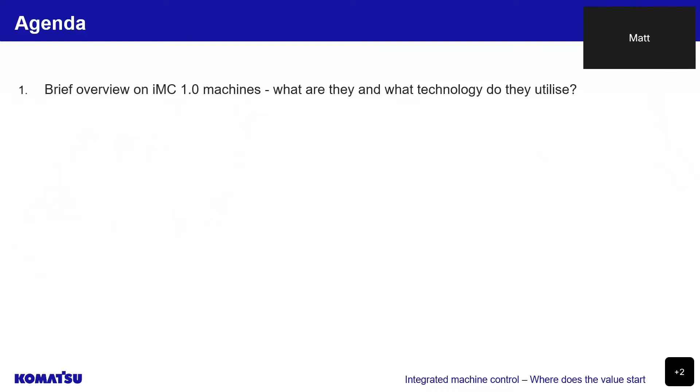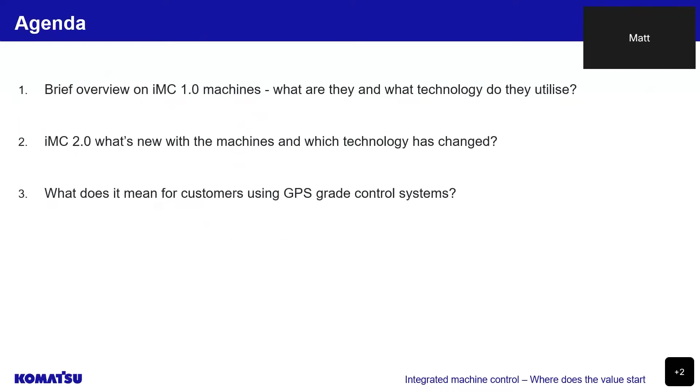In this webinar, we'll be taking a brief look back at our 1.0 machines and the technology they utilise. We will then dive into what's new with our 2.0 machines and their technology, and also talk about what it all means for customers using GPS-grade control systems, followed by some Q&A.

Firstly, I think to gain an understanding of our current technology, it's important to have some background knowledge on where we've come from. So let's look at our iMC 1.0 machines, the first iteration for intelligent machine control, and the technology they've utilised over the past 7 years.

Komatsu's original range of iMC bulldozers and excavators were an industry-leading first for not only safety and security, but efficiency and cost saving as well.

Starting with our bulldozer range, which you'll find on most civil construction sites, and beginning with the smallest bulldozer in our iMC range, the D61 EXI and PXI-23, an excellent trimming bulldozer. This bulldozer has an operating weight between 17.8 tonne to 20.5 tonne, a pat blade or power angle tilt blade, and an engine output of 168 horsepower.

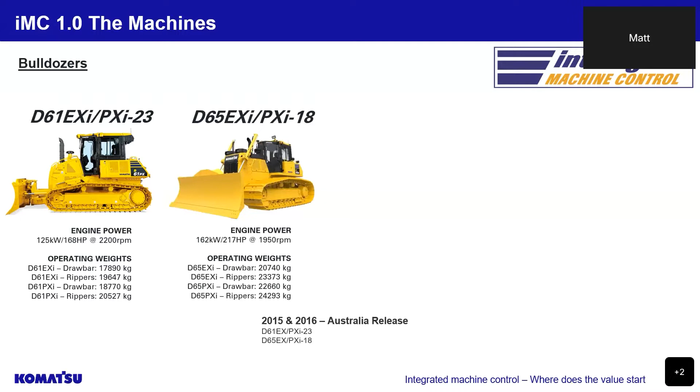Next in our lineup is the D65 EXI and PXI-18, with an operating weight between 20.7 tonne to 24.2 tonne, a pat blade, or the option for a blade and push arm style work equipment setup, as per the D85 and 155, and an engine output of 217 horsepower.

Then we have the D85 EXI and PXI-18, with an operating weight between 30.5 tonne to 32 tonne, a blade and push arm style work equipment setup, and an engine output of 264 horsepower.

And finally, we have the D155AXi-8, which is used for bulk earth moving works with an ability to trim to a design and an operating weight of 32.7 tonne to 42.4 tonne, a blade and push arm style work equipment setup, and an engine output of 354 horsepower. These models were all released into the Australian market between 2015 and 2016.

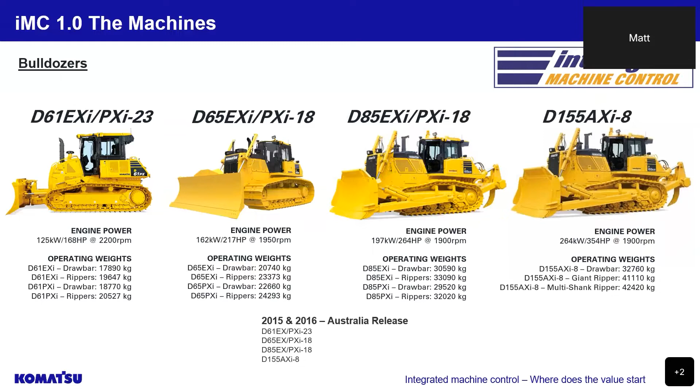The technology utilised in the 1.0 bulldozers was a single cab-top mounted GNSS or Global Navigation Satellite System antenna, responsible for receiving satellite signals in order to position the machine on the job site in relative coordinates. A chassis-mounted IMU, or inertial measuring unit sensor, which along with intelligent logic, orientates the body of the machine underneath the antenna, either sloped or flat.

Hydraulic cylinders with factory integrated stroke sensors monitoring the lift, tilt, and angle of the blade, allowing the machine control system to know the exact position of the blade at any given time. A factory installed touchscreen control box, allowing easy operator access to set or adjust design surfaces and to display GNSS satellite information.

4 working modes, which determine how the blade reacts to loads, which are cutting and carrying for long, shallow cuts or normal dozing operations, cutting for short-range cutting operation, spreading for the spreading operation of soil piled higher than the height of the blade, and simple grading used to carry out final trim or slope and batter work.

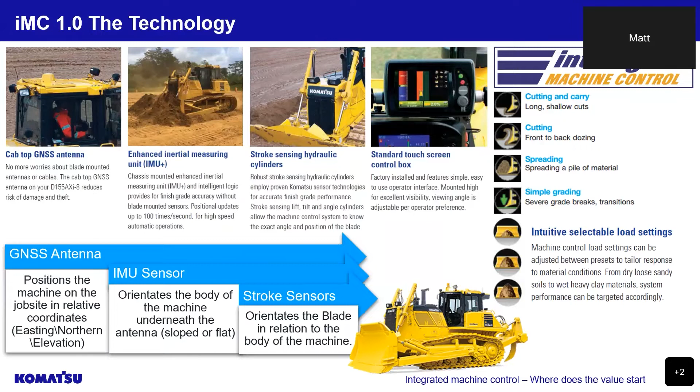And lastly, 3 intuitive blade load settings, selectable depending on the desired response to the given material conditions. For example, dry sandy material might call for a light load setting, whereas a heavy clay type material would call for a heavy load setting.

Looking at our excavator range, which started off with the PC210 LCI-10, released to the Australian market in 2016, with an operating weight of 22.6 tonne to 23.8 tonne, and an engine output of 158 horsepower.

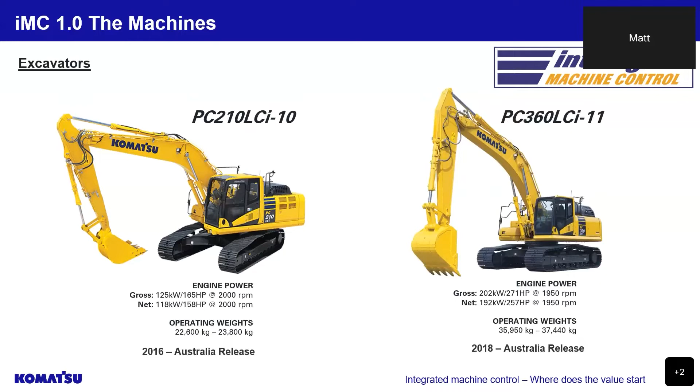Followed by the PC360 LCI-11 in 2018, with an operating weight of 35.9 tonne to 37.4 tonne, and an engine output of 257 horsepower.

Both of Komatsu's 1.0 excavators utilise the same technology, which includes stroke sensing hydraulic cylinders with factory integrated sensors to monitor boom, arm, and bucket positioning, allowing the control system to know the exact position of the bucket cutting edge at all times. An IMU, or inertial measuring unit, that monitors the pitch and roll of the machine in order to produce highly accurate finishing work.

2 GNSS antennas responsible for receiving satellite signals and sending them to a GNSS controller in order to accurately position the machine on the job site. A large 12-inch monitor allowing excellent visibility and ease of use with a touchscreen icon interface instead of a multi-step menu to simplify operations.

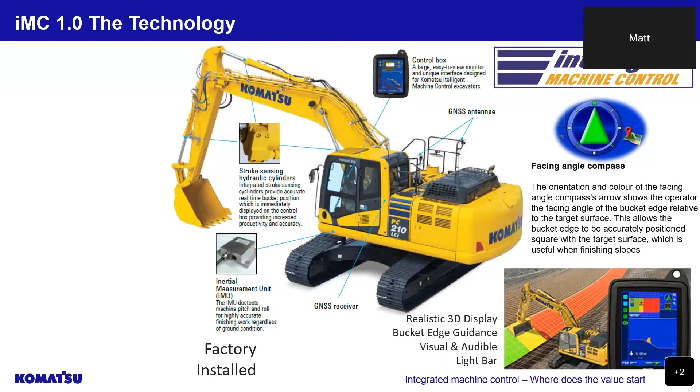A unique facing angle compass indicates the angle of the bucket in relation to the target surface. This assists the operator to accurately position the bucket edge square to the target surface.

An auto grade assist function for the arm movement, auto stop control function for the boom and bucket movement, and minimum distance control for the bucket edge, all of which we will go through in more detail when we look at the 2.0 excavators shortly.

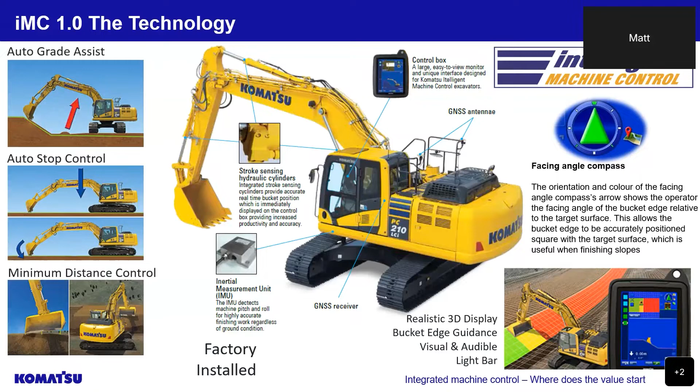So secondly, let's talk about the iMC 2.0 machines. When iMC 1.0 came on the scene, the benefits were all around increasing ease of operation and productivity. Komatsu's 2.0 machines are all about building on those features.

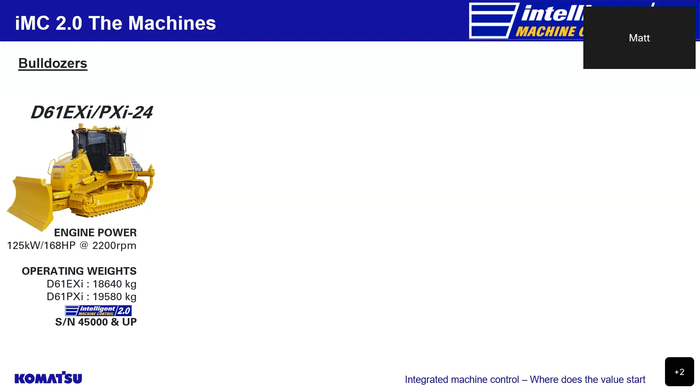Let's take a look at what is new with these machines and their technology, starting once again with our range of iMC bulldozers. If we look once again at Komatsu's D61 EXI and PXI bulldozer, it is now reclassed as a -24 with an operating weight of 18.6 tonne to 19.5 tonne. The engine output remains the same at 168 horsepower, and the improved 2.0 range starts at machines with a serial number of 45,000 and up.

Next, the D65 EXI and PXI-18. It now has an operating weight of 23.3 tonne to 24.2 tonne. The engine output remains at 217 horsepower, and the 2.0 range starts at machines with a serial number of 96,001 and up.

Last year, Komatsu introduced the all-new D71 EXI and PXI-24 into the Australian market, our largest HST, or hydrostatic transmission type bulldozer. This bulldozer has an operating weight of 22.7 to 24 tonne and an engine output of 240 horsepower.

Finally, in our 2.0 bulldozer range, we have the D85 EXI and PXI-18 with an operating weight of 29.7 tonne to 31 tonne and an engine output of 264 horsepower, with the new 2.0 range starting at machines with a serial number of 25,005 and up.

Unfortunately, the D155 didn't get a 2.0 update this time around, but I'm sure it'll be in the plan to have it upgraded soon.

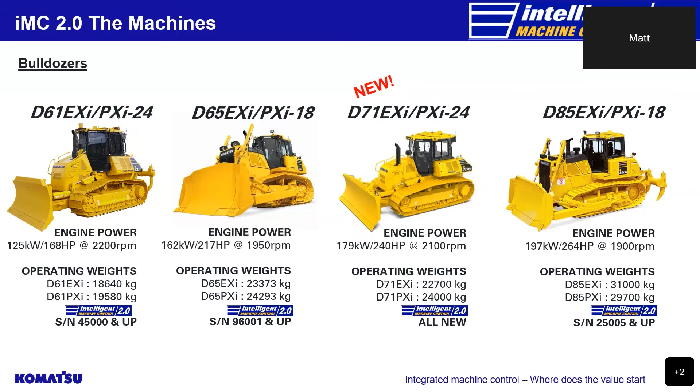Looking at the technology utilised on the 2.0 bulldozers, Komatsu's 2.0 bulldozers have dual multi-constellation GNSS antennas, which means that they can receive positioning information from American, Russian, Chinese, European, and Japanese satellites, whereas our 1.0 bulldozers will only receive signals from American and Russian satellites. This enables the machine to have high positioning accuracy due to an increase in satellite availability.

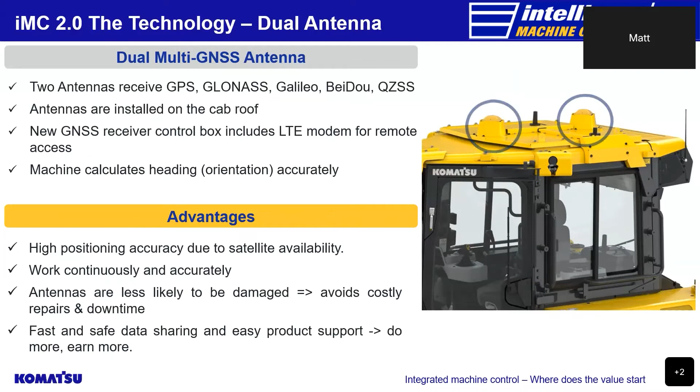Also, as the antennas are mounted to the top of the cab, they are less likely to require replacement due to damage or theft, as some pole-mounted variants may be. The dual antenna setup also allows the machine to immediately know which way it's facing or its orientation, making slope work more efficient.

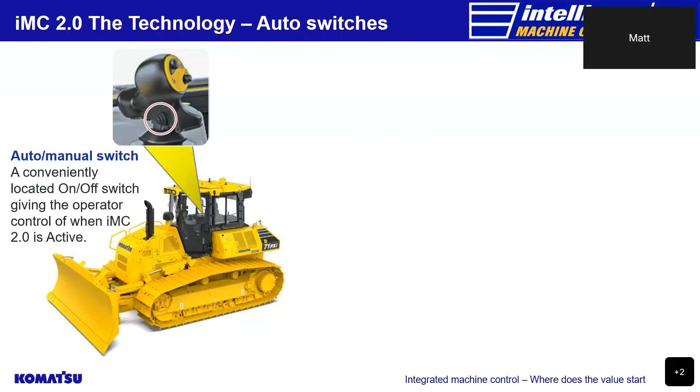All of Komatsu's iMC bulldozers have the auto and manual switch located at the front of the work equipment lever, allowing the operator quick access to the auto function at any time.

Cut, fill, offset switches are conveniently located just to the right of the work equipment lever, giving the operator the ability to adjust the target surface height without having to touch the control box.

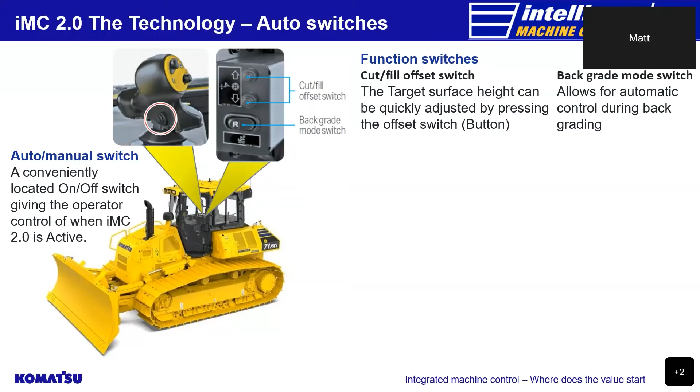On the same panel as the cut and fill switches is the industry-first backgrade mode switch, which allows for automatic control during backgrading, which is perfect for removing those deep track plate marks during final trim application.

And the easy-to-use touchscreen display features bright graphics and customizable views with a mount that allows the viewing angle to be adjusted to the operator's preference.

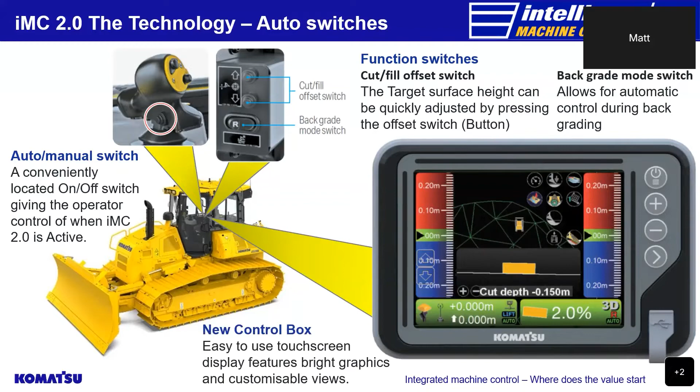With the quick surface creation function, the operator can now create temporary design surfaces such as flat or sloping planes with one press of a button, where previously this required cycling through various menus or, many years ago, having to wait for a simple design from a surveyor or designer.

Now the operator just needs to put the blade on the ground, press the shortcut button, set the main fall and cross fall, and start pushing dirt.

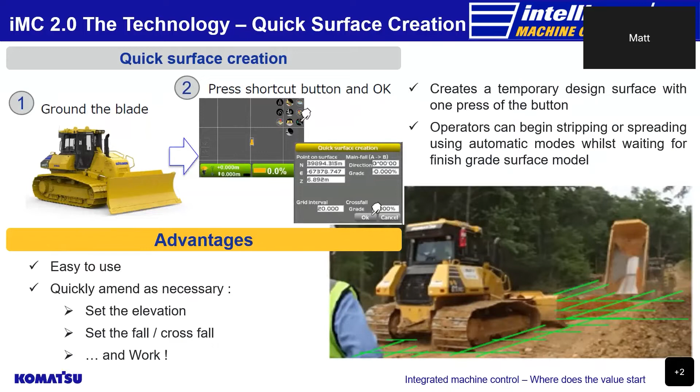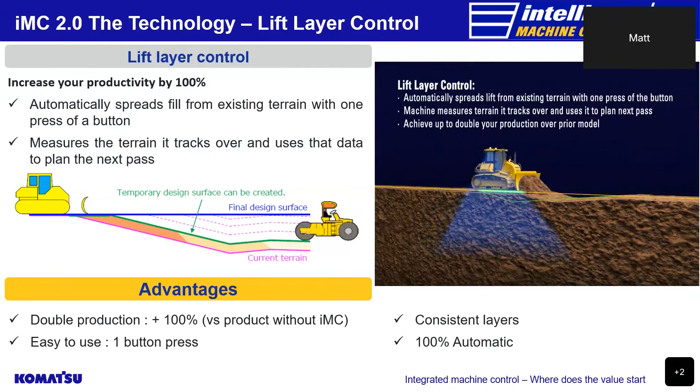You can now double production with the new lift layer control function. With the press of a button, the bulldozer automatically spreads fill to a consistent layer height by measuring the terrain it tracks over and using that data to plan the next pass. Excess fill is also eliminated, as automatic blade control will follow the finished surface once layers have reached finished grade.

Now I want to talk about the automatic tilt steering control in the 2.0 update.

With one press of a button, the bulldozer will automatically and continuously tilt the blade when a heading deviation is sensed. This works in part because of the dual GNSS antenna system on the 2.0 iMC bulldozers. Due to the accuracy in the heading now, the system knows when the machine is deviating from a straight travel direction, normally caused by an uneven load on the blade during cut and carry operations.

The system moves to correct this deviation by automatically tilting one edge of the blade into the ground, which steers the dozer back into the required heading. Because the system knows where the blade edges are in relation to the design surface, it will not allow the blade to cut through the finished surface level at any time.

This function allows steering input by the operator to be reduced by up to 80%, decreasing operator fatigue and increasing productivity due to straighter, cleaner cuts. Utilizing the blade to turn the machine also alleviates overheating of the hydraulic and transmission system, which is normally due to constant operation of the steering during cut and carry operations.

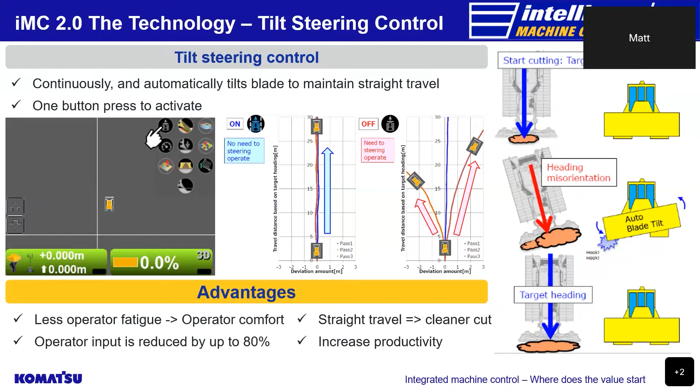New 2.0 bulldozers now have proactive dozing control, which utilizes the latest as-built or as-constructed data to perform cutting and carrying operations. Think of as-built data as positional information that the machine records as it's cutting or filling a design. That information is then strung together to create a picture of the newly cut surface, and this happens every time the bulldozer moves over the terrain.

A vertical adjustment or offset is applied, usually no more than 200 millimeters in depth, depending on the load setting from the operator, and the bulldozer now has a plan for the next cut. This allows the bulldozer to minimize undulation and undercut, and in addition, facilitates smoother and more efficient dozing operations, as if it were being performed by an expert operator, promoting less operator fatigue, leading to more productivity and safety.

Taking a look at the top diagram on the left-hand side, we see the old technology in use, showing the blade is not capable of following the current surface when in a cut and fill operation. In the bottom diagram, we see proactive dozing control in use, with the blade following the current surface, allowing for more efficient and smooth operations due to the blade being able to push for longer periods with less requirement to reverse back to load the blade again.

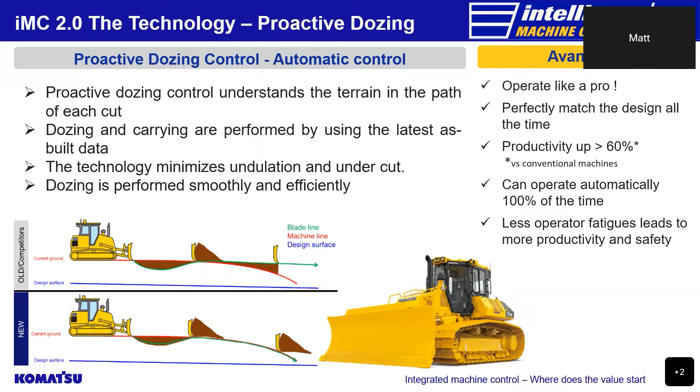Automatic mode also allows the operator to manually adjust the blade cutting height while auto is engaged to make the digging depth a little deeper or shallower depending on the operator's requirements. Similarly, if the current ground conditions differ excessively from the finished design surface, the tilt angle of the blade can be adjusted manually and the automatic mode will still prevent the blade from overdigging. This gives the operator the flexibility to adapt to any job site while using auto mode.

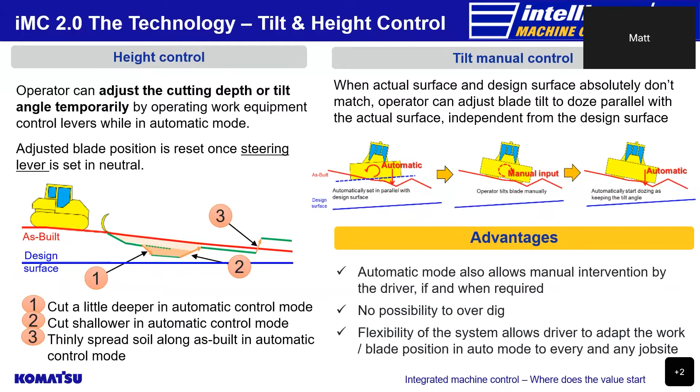So what does it mean for bulldozers? Well, traditionally, before any machines could move dirt, there was extensive preparation required, sometimes involving many hours of placing wooden stakes in the ground by surveyors to indicate the different finished surface levels within a project.

Not only was the initial staking out time-consuming, but when a stake was run over or moved accidentally by a machine, the surveyor then had to go back out and remeasure and restake. So this made construction work inefficient, costly, and also because of the need to be working around moving machinery to check the accuracy of the work, it was unsafe.

When machine control came onto the scene, there was a 41% overall reduction in the time taken to create a surface from a set design, and this was mainly due to the staking process being made redundant.

So how was such an integral process made redundant? Well, when a 3D design is created for machine control, it provides positional information for every line or surface in that design. So when the machine is done cutting a design to its finished surface level, there is no longer a need for staking out or to carry out grade checks.

Komatsu's iMC product improves by an average of 13% on that overall time reduction due to the functionality of our bulldozer work modes.

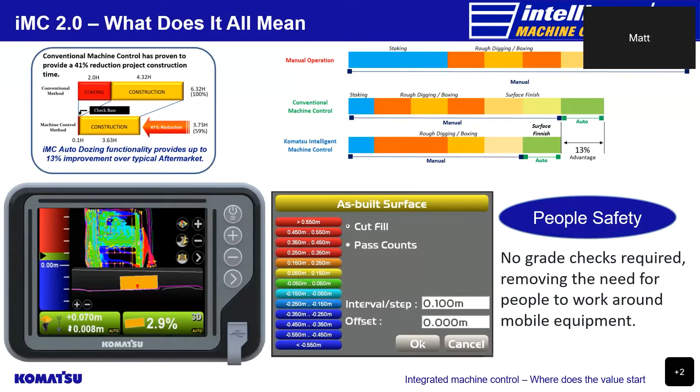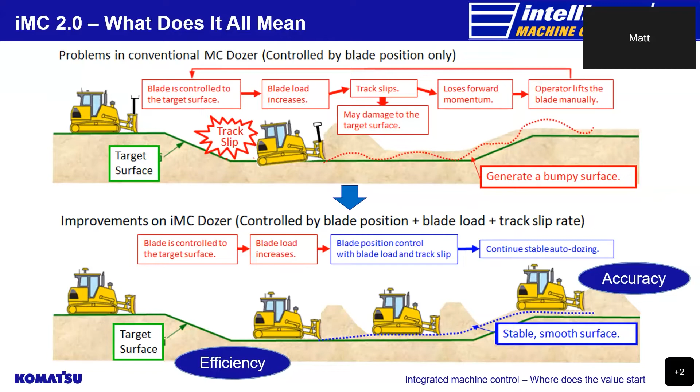This creates a smooth, stable surface finish, allows forward movement to continue, and with less blade lever operation required by the operator, makes the bulldozer operation more efficient.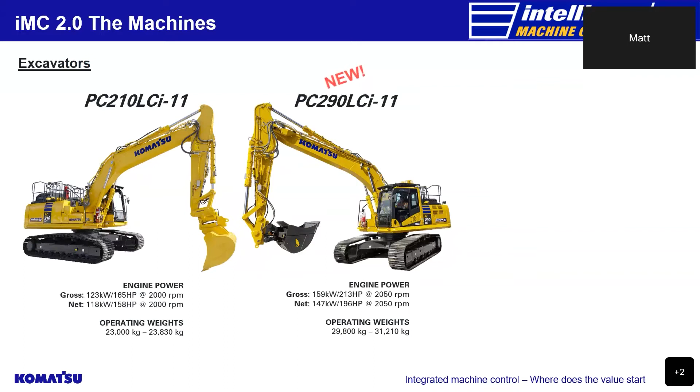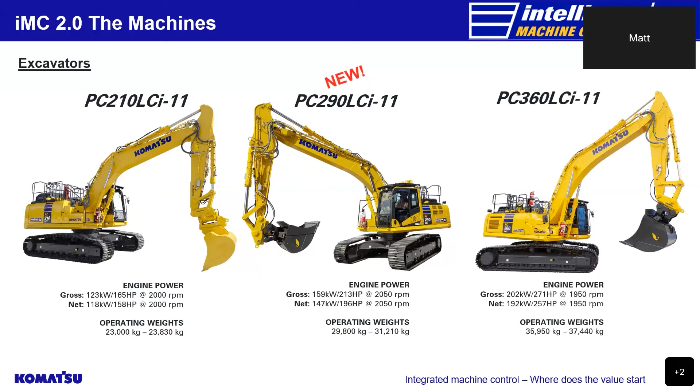Now to take a look at the iMC 2.0 excavator range. We start with the PC210LCi-11 with an operating weight of 23 to 23.8 tonne and an engine output of 165 horsepower. Then we step up to the new PC290LCi-11 with an operating weight of 29.8 to 31.2 tonne and an engine output of 213 horsepower. And currently, the biggest excavator in our iMC 2.0 range is the PC360LCi-11 with an operating weight of 35.9 to 37.4 tonne with an engine output of 271 horsepower.

Now let's look at the technology that has gone into the 2.0 excavators. The new excavators now have a more compact profile 10.4-inch monitor screen or control box. The control box is not only a monitor so the operator can see where he is in relation to the design, but it also figures out the position and direction of the machine by calculating the positional relationship of each multi-GNSS antenna.

The control box works out the coordinates of the current bucket blade edge by calculating the machine position, machine direction, work equipment posture, machine pitch angle, and machine roll angle. The control box also figures out the distance the bucket cutting edge is from the finished surface design by calculating the target bucket blade edge coordinates and comparing them to the actual bucket blade edge coordinates.

As with our new range of bulldozers, the excavators have two multi-constellation GNSS antennas, allowing positioning information from American, Russian, Chinese, European, and Japanese satellites, enabling the machines to have high positioning accuracy due to an increase in satellite availability.

2.0 excavators utilize an IMU sensor on either a tilt hitch or a tilt bucket setup, allowing for auto tilt control.

Our new excavators use an updated GNSS controller with a combined 4G modem installed, reducing the number of components in the cab compared to the previous model. There is an IMU on the upper structure that determines the pitch and roll of the machine and communicates this to the control box in order to produce highly accurate finishing work.

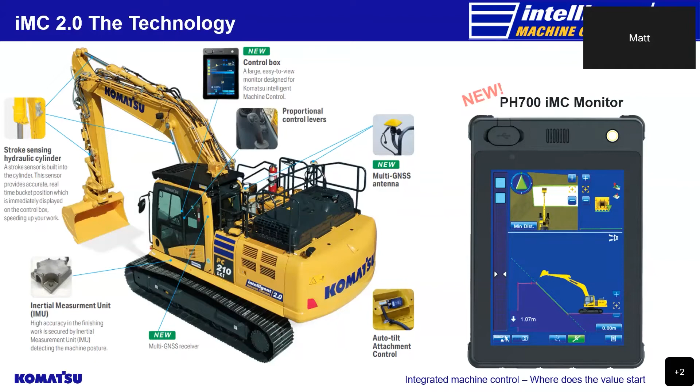The new machine control functions included in our 2.0 iMC excavator technology are the bucket angle hold control, in which the system automatically maintains the operator set bucket angle throughout the entire grading pass; the auto tilt attachment control, which automatically tilts the bucket to the design surface and returns it to horizontal for unloading; minimum distance control, which automatically selects the bucket point closest to the surface; auto stop control, which prevents the bucket edge digging through the finished design surface; and auto grade assist, which allows the boom to automatically adjust the bucket height.

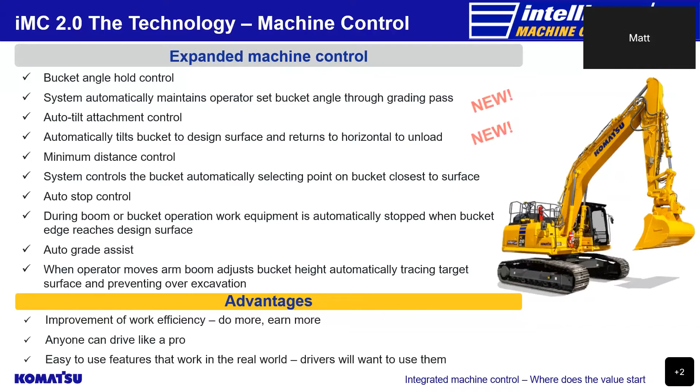These new additions to the iMC excavator system improve the work efficiency, allowing less skilled operators to carry out work usually performed by more experienced operators.

With the bucket angle hold feature, when the operator places the bucket on the design surface and operates the arm lever, either in or out, the 2.0 excavator system will keep the bucket at that angle as the arm moves, improving the final grade accuracy and increasing ease of operation.

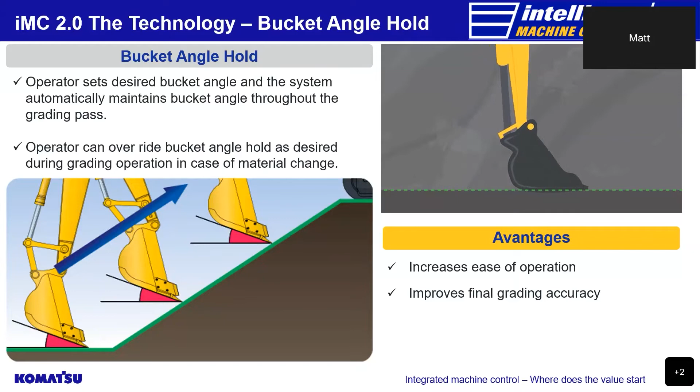Komatsu's new auto tilt attachment function will automatically match the bucket angle with the design of the slope when the bucket is operated within 200 millimeters of the design surface, whilst using the auto function with minimum distance control.

And will also automatically return the bucket to a flat position for unloading when the bucket is moved away from the design surface. If we take a look at the animation on the right of the screen, we can see what it would look like when the auto tilt function takes effect. The dotted line represents the design's finished surface level.

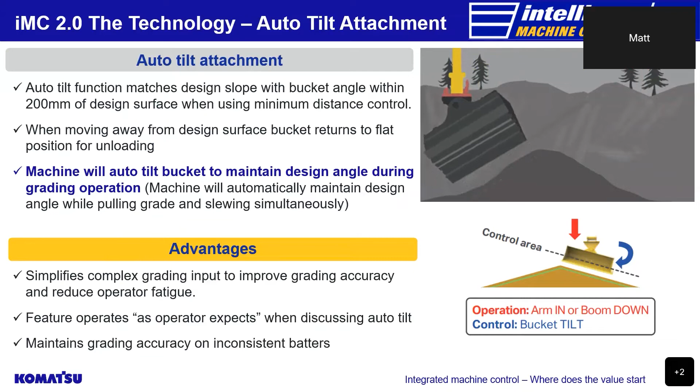This feature simplifies complex grading tasks while improving the grading accuracy of inexperienced operators and at the same time reducing operator fatigue. Maintaining grade accuracy over extended periods of time decreases the possibility of rework and therefore increases the efficiency of the operation and overall the business.

Feedback from our customers indicated that the 1.0 tilt harness attachment connection was a stress point and that the M12 5-pin cable used was often damaged. For the 2.0 iMC excavator range, Komatsu moved the connection point for the IMU tilt sensor harness to the left-hand side of the arm and terminated the harness with an industry standard 4-pin Deutsch connector, while providing a reinforced and protected connection area straight from factory.

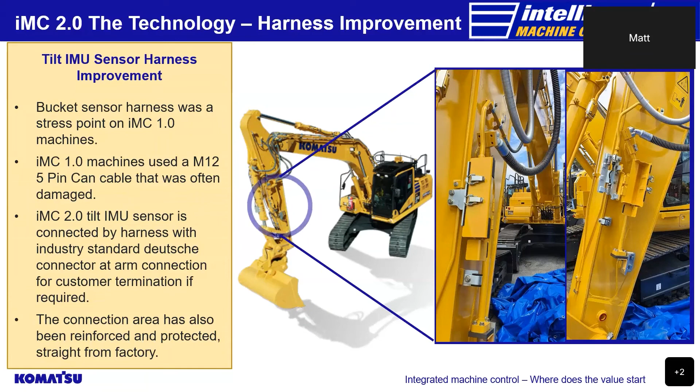Komatsu's minimum distance control function allows the attachment's point of reference to be automatically selected based on which tip of the attachment is closest to the design surface. This minimizes the need for operator input, reducing fatigue, preventing rework, and increasing productivity. This function is critical for the auto stop control and auto tilt control functions in preventing over-excavation of the design surface.

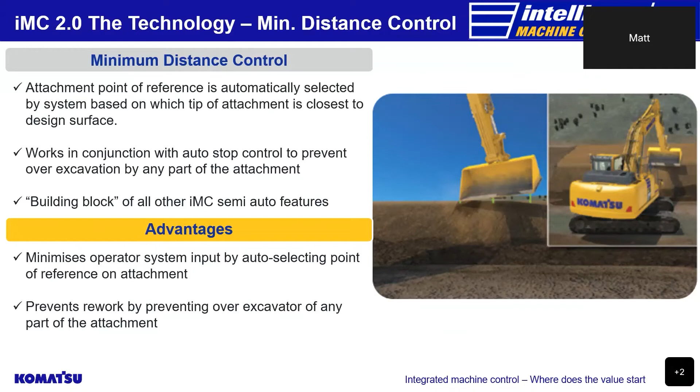When operating the boom or bucket during semi-auto mode, Komatsu's auto stop control feature prevents over-excavation or damage to the design surface by automatically stopping the bucket tip when it reaches the finished surface level of the design. Looking at the animation on the right of the screen, we see the operator moving the boom towards the design surface, and then the boom stopping automatically as the bucket tip reaches the surface.

A dotted line again represents the design finished surface level. This allows the operator to focus on other areas of operations rather than keeping an eye on the numbers on the control box for height and depth indication, as with guidance-only systems. This aids in allowing less experienced operators to work more accurately and efficiently, and therefore helping the business become more productive.

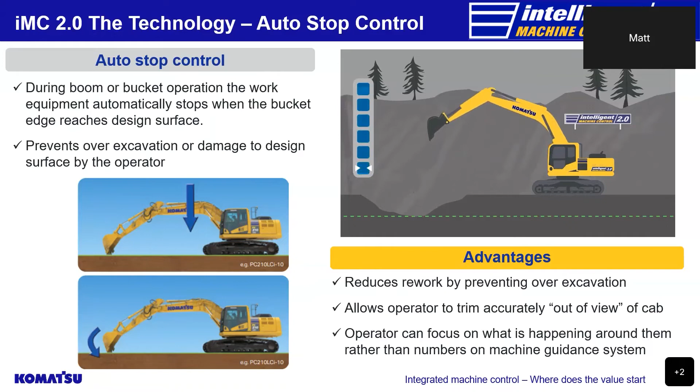When the operator moves the arm while digging in semi-auto mode, the auto grade assist function maintains the attachment's position above the design grade through each pass by raising the boom automatically to match the operator's input for the arm or the combined input of arm and bucket.

Looking at the animation on the right of the screen, we can see that as the operator carries out the trimming operations with the arm function, the boom is automatically rising. Also, as the arm starts to move past the vertical, the operator is utilizing his boom down lever in order to extend his working range.

The auto grade assist function allows the operator to carry out rough digging work without worrying about over excavation. It also allows the operator to perform trimming work while only needing to operate the arm, and, if required, the operator can manually adjust the bucket angle to ensure the optimal trimming result.

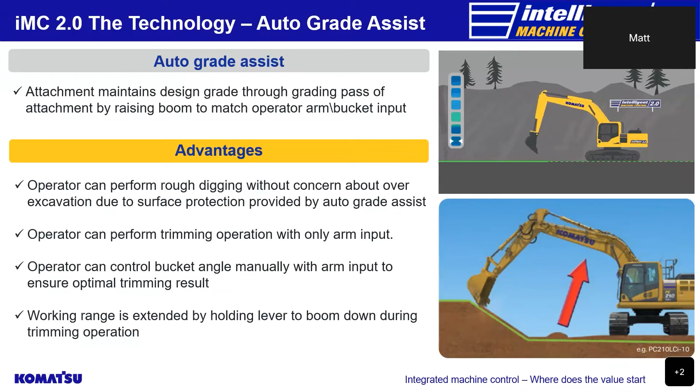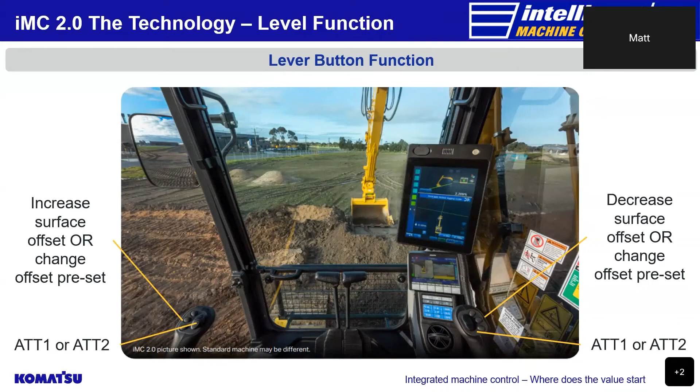Komatsu's 2.0 iMC excavator range now gives the operator a greater choice in how they would like their attachments set up. Not only can they adjust the hydraulic oil flow rate supplied to the attachment, but operators are now able to change whether they want attachment 1 or 2 on the left lever or the right lever with a press of a button. Operators are also able to increase or decrease the surface offset without having to take their hands off the lever.

So what do all the systems aim to do? What does it all mean? Well, Komatsu set both a sloping and trenching project for an inexperienced operator and an experienced operator. The results showed that when carrying out slope work, an experienced operator who had moved from an excavator that had no machine control to one that had machine guidance only, there was a 54% reduction in working hours required to complete the task. When that same operator moved from the excavator with machine guidance only to an iMC excavator, there was a further 23% reduction in working hours required to complete the project.

When the novice operator carried out the slope work in an excavator with no machine control and then moved to one that had machine guidance only, there was only a 19% reduction in work hours required to complete the task, mainly due to the overall operational inexperience. But when that same novice operator moved to an iMC excavator, there was a 54% reduction in work hours in order to complete the project, that is.

And when comparing the novice to the experienced operator, utilizing Komatsu's iMC system provides just a 31% difference in total work hours required to complete the task.

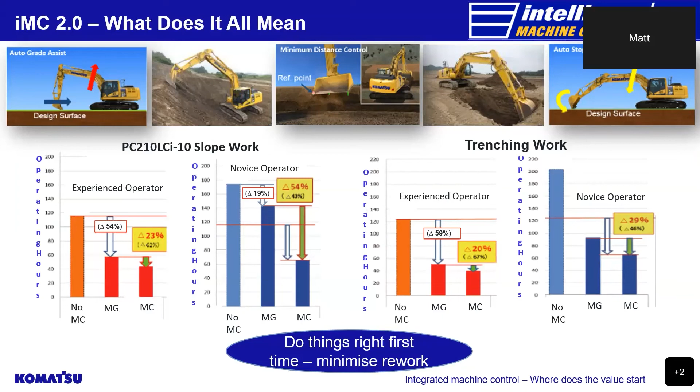That brings us to the end of the webinar presentation. I will hand back over to Anna for some questions from the viewers.